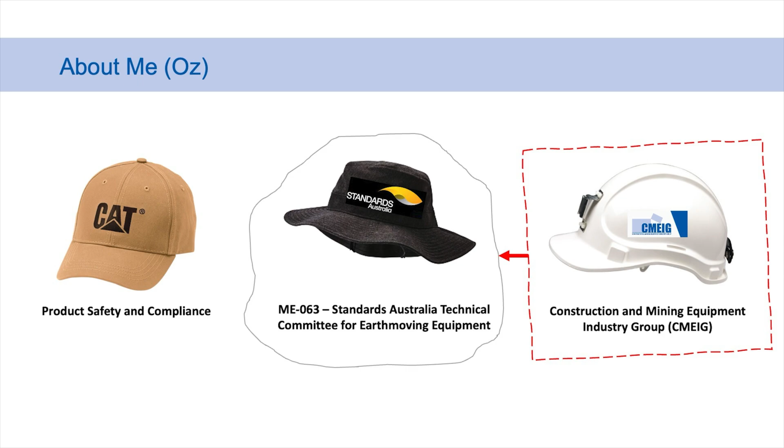So a little bit about myself. My name is Osama, please call me Oz. I have a day job at Caterpillar where I cover product safety and compliance for the Australasia region. But I'll point your attention to the two hats on the right, those are the ones I'm actually wearing today. I'm here representing an organization called CMEIG and another organization called Standards Australia.

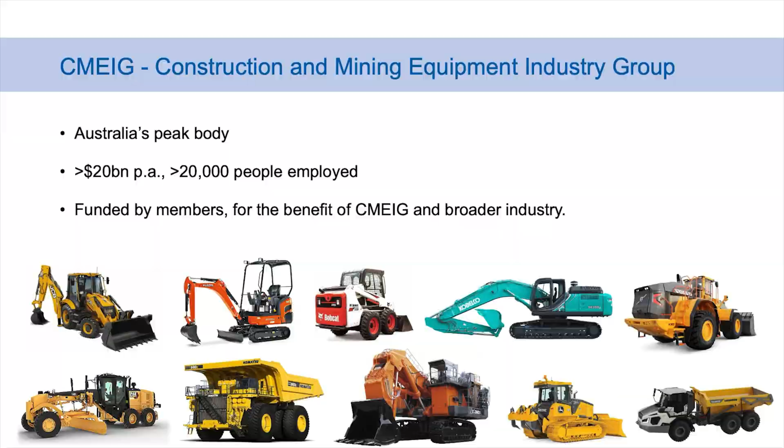CMEIG is the Australian Construction and Mining Equipment Industry Group. It's the peak body for the manufacturers of the types of equipment you see on screen. A pretty large organization, very active in standards development, and it's really funded by the OEMs to cover industry issues relevant to CMEIG.

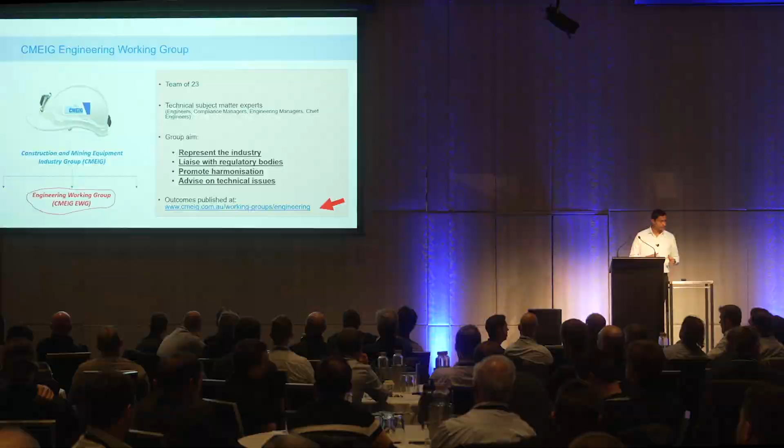Like the Mechanical Engineering Safety Seminar is a safe space for certain types of engineers, clearly not mining engineers or electrical engineers, in CMEIG there's a safe space for engineers too, called the Engineering Working Group. The intent of this group is really to offer up someone from each OEM as tribute, and we collectively discuss industry issues relevant to us, and then provide advice.

This is the point where I tell you the whole purpose of my presentation. If you have your phone in front of you, go to www.cmeig.com.au, click on Working Groups, Engineering. There's some great information there, written by people that couldn't sell ice to Eskimos. It's written by engineers for this community. Some of you might have already used it.

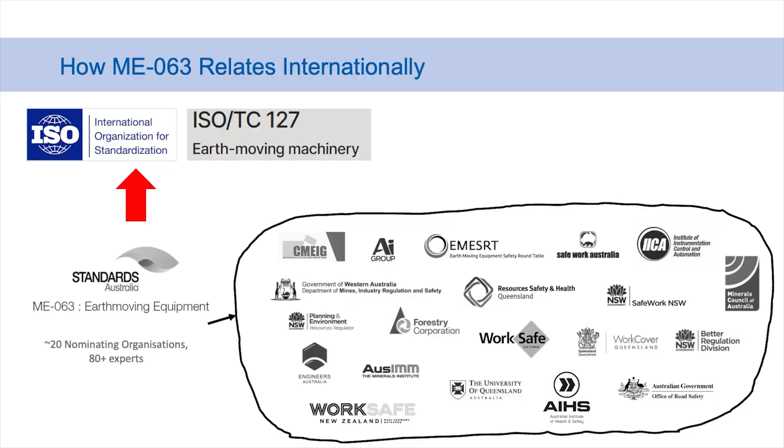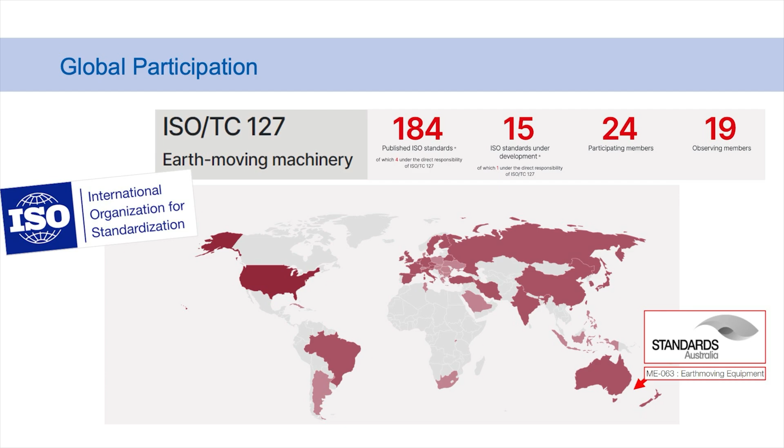That whole ME63 organization in Australia feeds up into an international committee called ISO TC 127, Technical Committee 127, that deals with the same topic. The only difference is Australia is one of 43 voices from around the world that feed into the writing of these international standards. There's 184 or 185 standards in that portfolio, and I think 15 that are currently actively being worked on. There's a lot of great work being done.

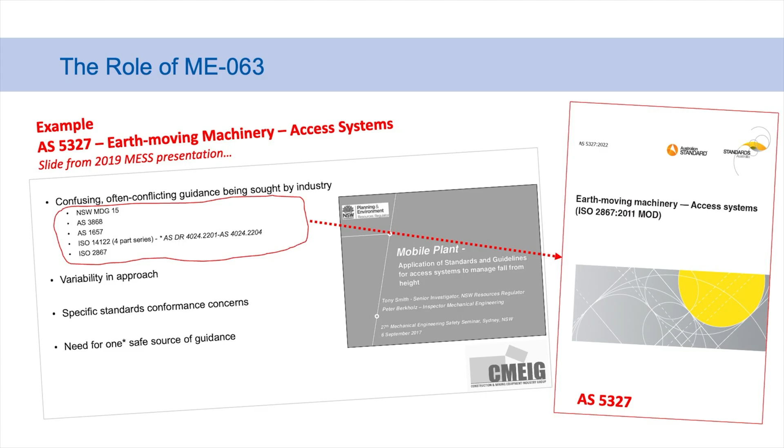But I'm gonna move us back to Australia for a sec. Hands up if you're familiar with AS 5327, Earth Moving Machinery Access Systems. Good, I'm seeing a few hands. So this is a standard that deals with steps, platforms, walkways, basically anything you would touch and feel and work your way through as you got from the operator cab or a maintenance area to off the machine.

I presented in 2019 on this topic, and I would characterize it as: before that time, we had 5 sources of guidance being used. There was a fixed plant standard, an old Australian standard, some guidance from EMESRT, and some international standards. The problem is if you have a lot of standards written by different groups of experts that came together, they're going to have technical differences. You're going to have a lot of trouble determining what is reasonably practicable, what is the benchmark, because they're just fundamentally different because of where they came from.

So the intent of AS 5327 was to take all that guidance and put it together in one document, so that you have one safe source you can go to and say, hey, this is the industry consensus position for what you need to do for access systems on machines.

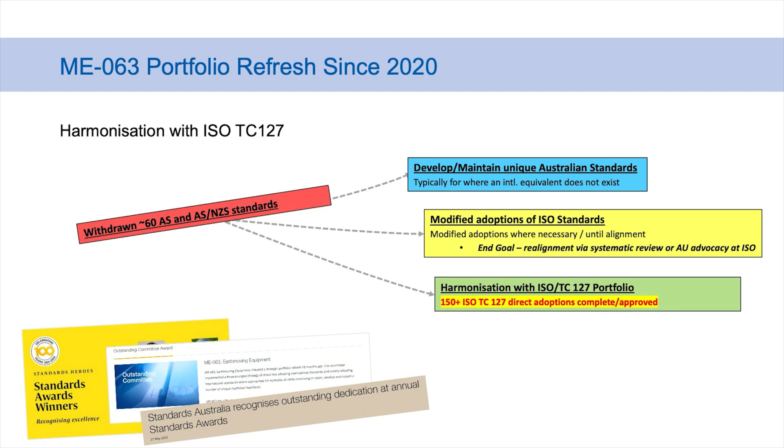So we took that approach from 2019 with AS 5327 and then leveraged it across the whole portfolio of standards we had. At the time, we had 60 standards. I think the oldest one was from 1982, and the newest one was from 2006. So quite a dated portfolio.

So what we did was we took that portfolio of standards and we put them into 3 baskets. One of them was, what is the international best practice standard? Do we have any objections to it? If not, let's adopt it as an Australian standard as is. And we've done that with 154 of them so far.

We had the second basket where, hey, we have genuine reasons for having perhaps a higher standard of bar, or a different standard of bar, because of the way we do things here. So they fell into this modified standard category. And then we have this final category where there really is no other international standard out there that we're aware of, and so we're going to maintain those as Australian standards.

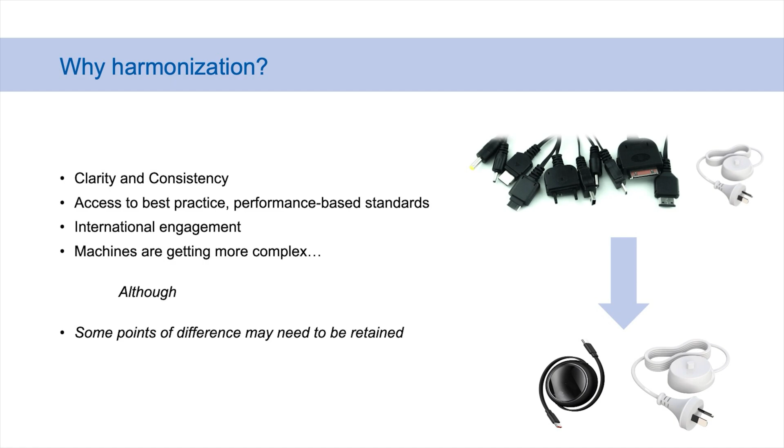So there's probably this question coming up now about why would you do this? What's the benefit of harmonization? It may be obvious to some, but I'll cover it anyway. Really, it's about clarity and consistency. You want to know what the benchmark is. Standards are your safe source, right?

There is also a benefit here to look at if there's an international community writing these standards. And the reality is, mining is big in Australia, but if you look at the broader earth-moving machinery sector, we're a very small piece of the international market, and we don't really have any manufacturers here. So there's an element of trying to not boil the ocean and focus on what are the things that we think are important, why are they important, let's make that clear.

But for everything else, let's make this as clear and concise as possible. Participating internationally, having the same portfolio of standards with modifications or without, also opens up this opportunity that, well, now we can take Australian experts and they can actually participate directly in the international standard that's being developed.

The final comment, and Cameron kind of touched on this in his intro, Robin touched on it, machines are getting a lot more complex. They really are. Machines, earth-moving machines are just like your cars. They are computers on wheels or tracks. They might have 20 computers on board. They might have a couple hundred sensors. There's a lot of software that is really driving that machine.

If you're going to take a machine and you're going to put, Robin, you mentioned e-stops, so I'll use that as an example, what do you want that e-stop to do? Australia is the only country that puts e-stops on machines. It's relatively easy to do when your answer is turn off the engine. When your answer is going to be, you have an engine, you have a battery pack, you have some other functions, you have telemetry, what do you want it to do? This is going to become very complex unless we have a standard format to use.

So where to next? Now, this is the next cab off the rank for ME63. It's been something we've been working on as a committee for probably the last couple of years, but it's getting to the pointy end.

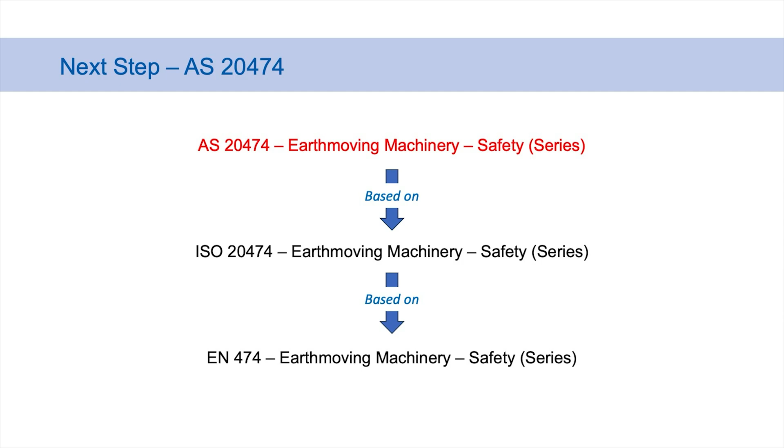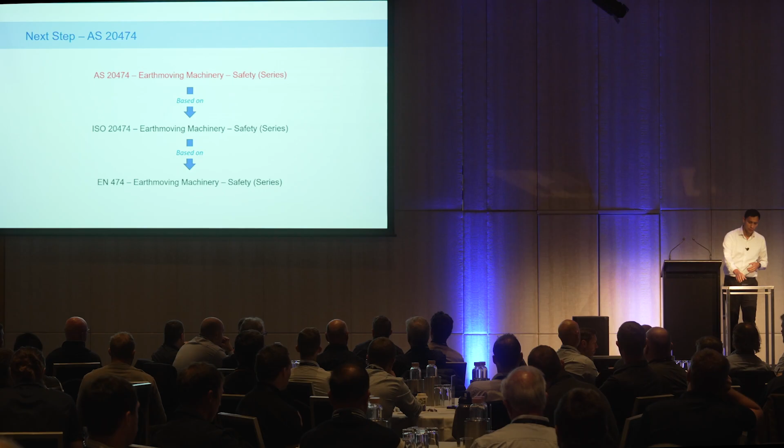AS20474, Earth-Moving Machinery Safety, is a series of standards. In Europe, there's a standard series called EN474. If you meet that standard, that's a regulatory requirement, and you put a CE mark on your machine indicating you meet the legislative obligations in Europe. That standard was converted into an ISO standard, ISO 20474, around 2016 for the last revision. We've started working on our own version of that, which is AS 20474.

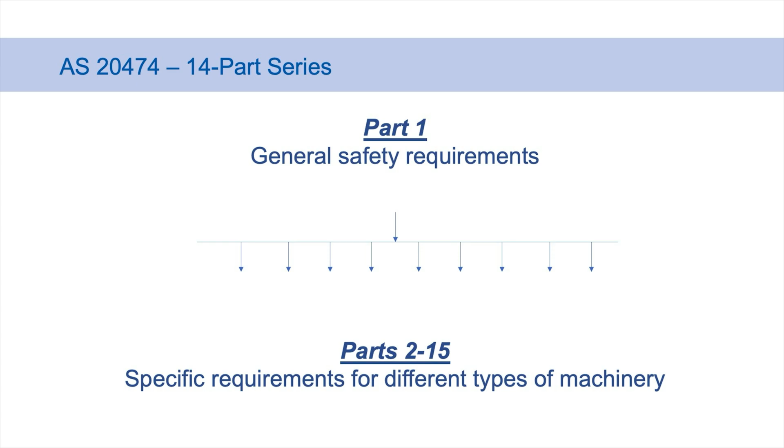There's a part 1, general safety requirements, and then 13 other parts. If anybody wants to ask why the numbers go to 15 but there's only 14 parts, I'll look forward to that question.

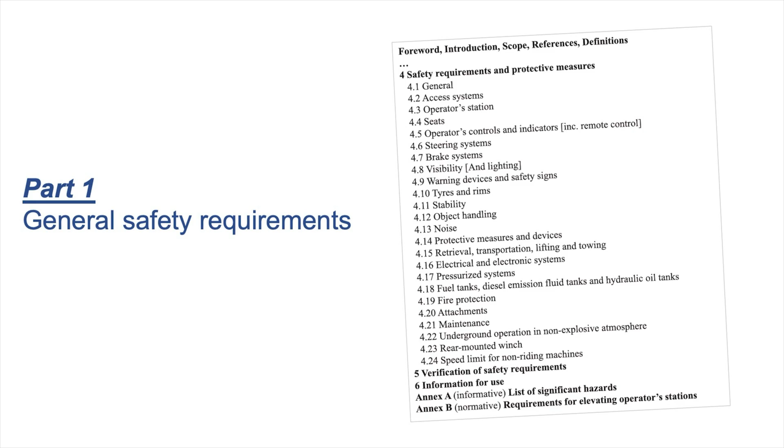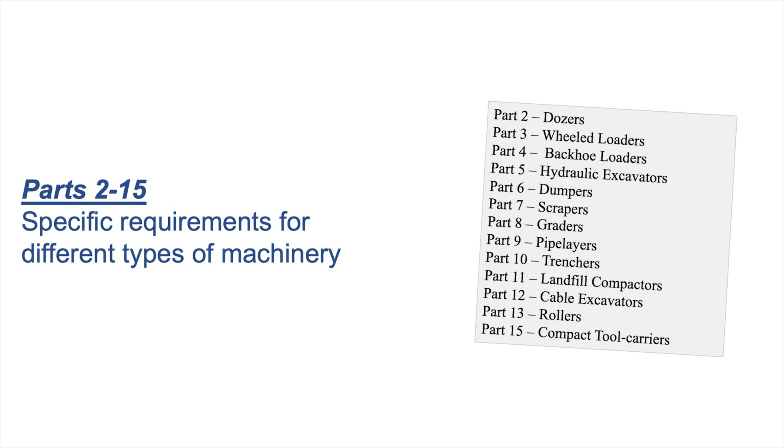Think of part 1 like the overarching requirements every earth-moving machine needs to have. It'll have a section on seats, vibration, noise, ROPS, brakes, steering, and in a lot of cases it'll say these are some requirements, then say go read AS 3450 for brakes, or 5010 for steering, et cetera. Then you have parts 2 to 15, which are specific requirements for specific types of machines. So 2 is dozers, 3 is loaders, 6 is trucks, et cetera.

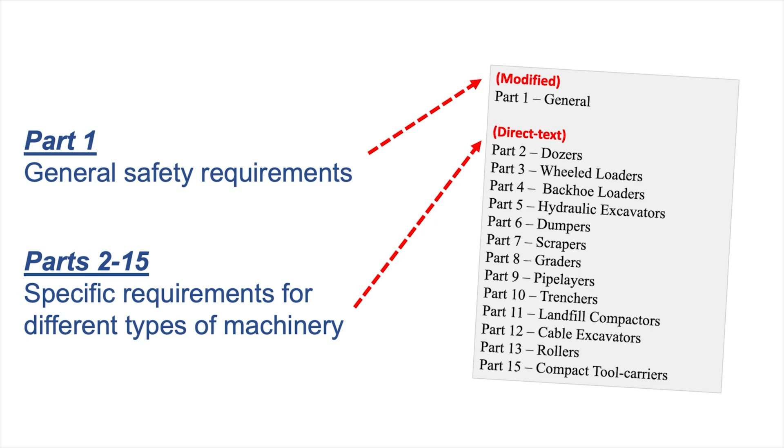The direction we've gone in ME63 is that part 1 is going to have some modifications. There are some things where Australia is different and not covered in the ISO standard, so we're going to address those in that Australian modification. For the other 13 parts, they are going to be direct text adoptions.

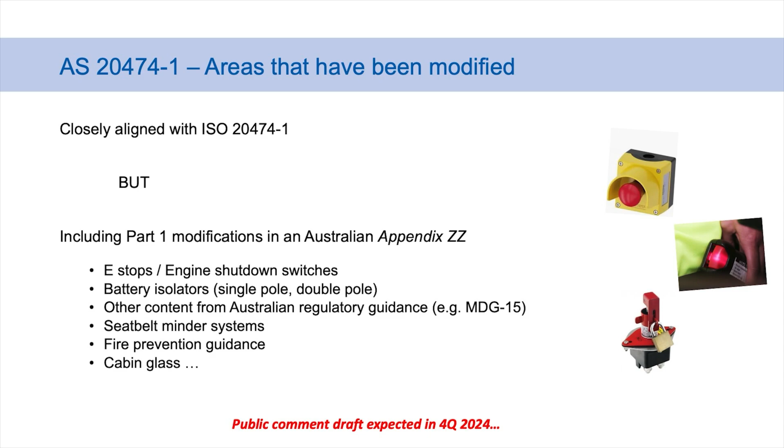Here are some of the key modifications you'll see shortly when this comes out for public comment. There's some guidance around e-stops and shutdown switches. It might not be true for New South Wales mines, but certainly the rest of Australia and non-mining - if you have an e-stop on your machine and press a button, it may well do nothing, because it may not have any monitoring. There's a whole argument around whether that's acceptable, whether it's intended to replicate existing machine control, or just another tool you can check manually over time and accept a certain level of it not working every time. The standard does have some language around that.

It has some language around double pole and single pole isolators and when each is appropriate. It has some guidance related to the leading cause of injury and fatality on earth-moving machines globally, which is still people not wearing a seatbelt - things to encourage wearing seatbelts, and things to monitor when somebody leaves a seat and the machine hasn't been put into a park position or an interlock applied. It'll have some guidance on that.

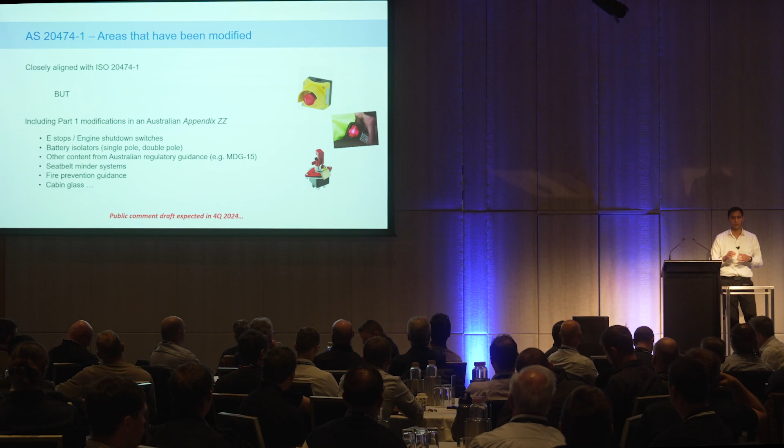It's going to come out for public comment probably a couple of months from now, so look out for it. If you don't have a notification, go to Standards Australia's website and subscribe to notifications, and you will see when standards come out for public comment.

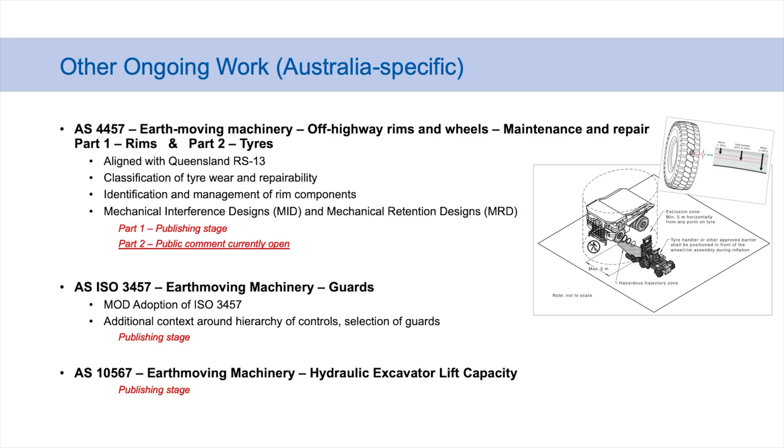There's some other work ongoing. There's a 2-part project related to tires and rims in development. Part 1 deals with rims and is at the final publishing stage, should come out in the next month. Part 2 deals with tires and is currently at public comment for another week and a bit. Feel free to log on, have a look at it, and make comments - we'd very much welcome those.

If I summarize the big changes in these standards, part 1 is focusing more on making sure you don't mix and match components on split rims, so you don't put the wrong lock ring on a machine. It's also got guidance around the fitment of devices like, I'll use the trade name SureLock, and other such devices that either retain the lock ring or prevent inflation if it's not correctly seated.

There's a couple other projects - one related to guarding that should publish in the next month. And there's another one for lifting with excavators and how you determine the change in stability limits depending on if you're across the tracks or over the tracks, if your boom and stick are all the way out, et cetera.

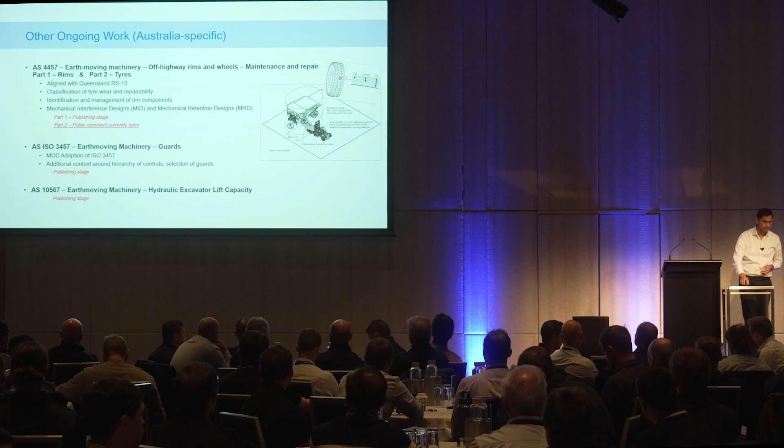There are also a large number of international standards that are in development at the moment. There's 15. I've covered the ones that I think this group is going to be most interested in.

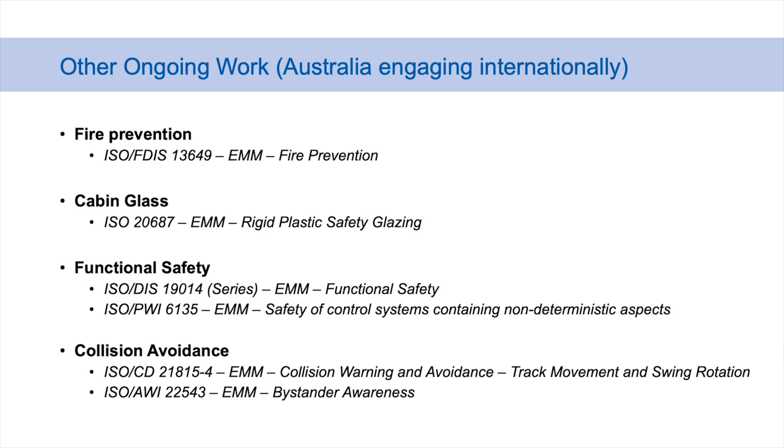The first one is ISO 13649, which deals with fire prevention. This should publish by the end of this year. It'll look very familiar to you because it has a lot of the language that's in AS 5062 around design, which has been captured into this international standard.

Think of it as complementary. The intent is that this is going to help the designer of your machine with, hey, here's the 20 things you need to think about that are seen at the end point of a machine catching on fire. There's not going to be surprises.

A lot of it is hose maintenance, but it's also how do you design to make it easier to do that? How do you make it easier to design so that it's easier to reroute hoses the same way that it was done at the factory after its first big change-up?

There's a standard going on about cabin glass, and I'll cover this in a little bit more detail later on. There's some work being done around functional safety standards to make them aligned for use in Europe. There's also a new standard underway to deal with how do you do functional safety for non-deterministic control systems.

So this is when you are essentially using AI or some sort of probabilistic algorithm. Think of autonomy programs. You can't really use traditional functional safety standards as they stand, so there's a project to try and work on that.

There's also some work being done around collision avoidance. There's basic collision avoidance—think of it like put it in reverse, doesn't move if it detects an object. This part 4 that's in development is around swing frames, so think excavators mainly. How do you deal with rotational collision avoidance zones, and how do you deal with track machines?

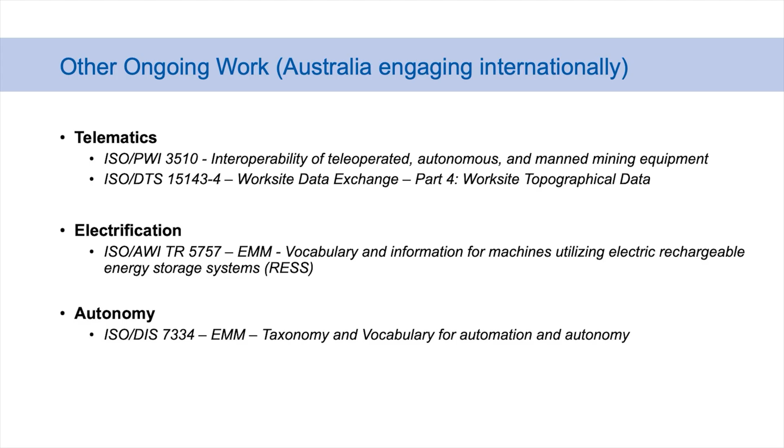There's work around electrification, and most of that at the moment has been exploratory. You have this large portfolio of standards. How do you apply those standards to an electrified powertrain?

And it's uncovering some interesting things, like there's an hour meter standard, and it's completely redundant for a battery electric machine, because hour meters are used for service, for warranty, for used machines. So how do you determine hours of usage when you have a battery electric platform or a hybrid platform versus what we're used to seeing?

And there's also some work being done around autonomy where there's a bit more maturity in the sector, and we're at the point where it's time to start defining different levels of autonomy. Like you have in cars, you have level 0 to level 5, similar kind of taxonomy for earth-moving machines.

So this is the point where you go, tell me more about standards—it's so exciting. In your commercial statements, you always have these forward-looking statements. It kind of says, treat this as just an opinion about how things are going to be in the future. I've got just a few slides to do that for you here. These are things that are being discussed in the standards world, either in Australia or internationally. They're not ready for prime time.

They're not at a position that you're going to see a published standard this year or next year, but I wanted to give you some insights.

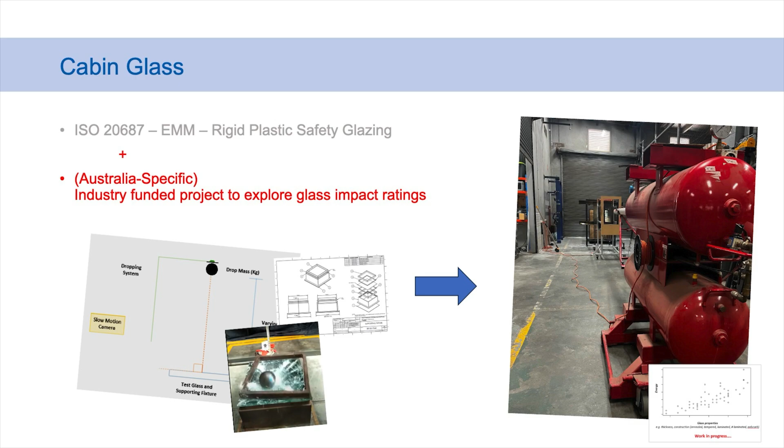The first is around glass, and some of you might have done glass testing to AS2080. It's like a 300 mil by 300 mil box. You drop a 2.2 kilo ball from 4 meters. Some people have changed that to 9 meters. So you end up with about 200 joules of impact energy.

There's some work being done internationally to look at plastics, so polycarbonate windows rather than your conventional laminate or tempered glass. And we're talking about 2,000 joules instead of 200 joules. You get to this point where you'd have to drop it from quite a big height and change the mass and shape of the ball.

Instead, you could go down the Mythbusters route and get an air cannon and shoot a projectile horizontally. There's been some industry-funded research to do that in Australia, but looking more at the laminated glass rather than the polycarbonates. If you want a pecking order, tempered glass capability is about down here, laminated's probably somewhere here, and then polycarbonates are beyond that.

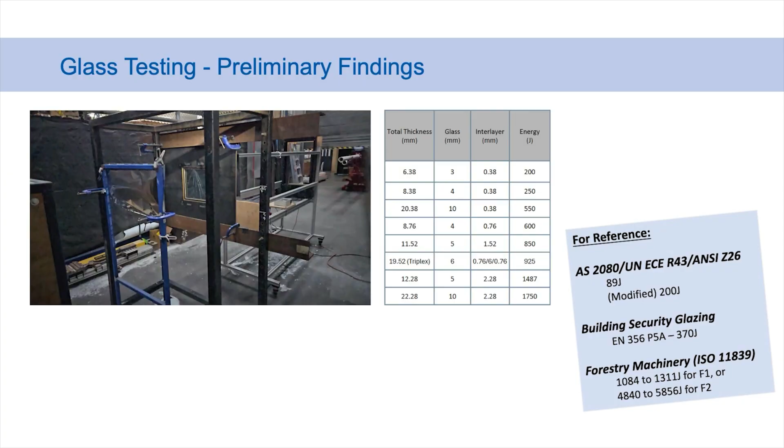So I hope this video plays. See that? That's about 2,000 joules going through a chronograph into a vertical assembly with a 300 mil by 300 mil glass sample. The blue frame you see moving away from you at slow-mo speeds has a witness card that's meant to reflect the human body a certain distance behind the glass on the inside of the cab.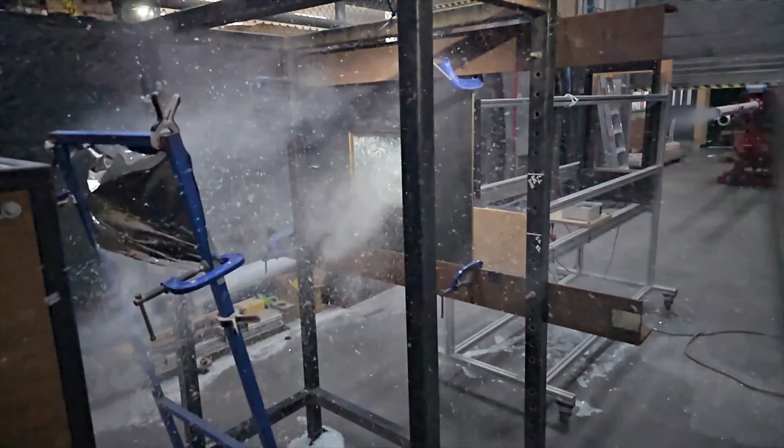The issue that we're seeing, and spoiler alert for a report that'll come out in the next few months, it's not so much the thickness of the glass that matters. It's actually more the thickness of the laminate layer, because that's what holds it together. The issue you have is if you have glass sandwiched with laminate and glass, you'll stop the projectile, but the spalling out the back end will do some serious damage still.

So short term, what's the answer? More work required, but the answer may be something like you need a tint film on the inside of your cab. There's some practical issues with how easy is it to apply those, how robust are they, do they haze? But that's the direction it's going. Basically, the thicker the laminate, the better the performance.

I've been working around standards for about 15 years, and it's quite an interesting time to be in this space. I was going to say dynamic, but saying it's a dynamic time and standards in the same sentence just doesn't work. But there's a lot of existing standards work.

Like Robin pointed out, there's a lot of things like visibility standards, braking standards that are being looked at. But then there's all these emerging topics that are your step change items. They're fundamental differences to how you operate machines, and so the standards that are written around that. Starting to see some of those step change topics come up.

There's also, because we're entering a new era, you have safety standards which come more from a maturity, and then now you have performance standards because it's such a new area and you actually have to write those again. The old version of performance standards would be things like, how do you measure volume in a bucket? We're kind of getting to, how do you measure fuel efficiency or energy efficiency for a machine. Those kinds of standards are coming back into the forefront.

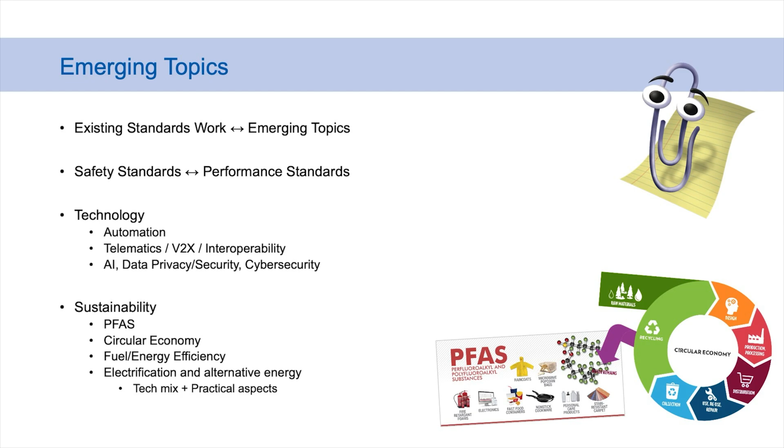There's a lot of talk about how do you manage that interoperability. And there's a lot of talk about AI. Some of it is flavor of the month, just giving you my opinion. You remember Clippy back with Word and Excel back in the 90s? Yeah, Clippy was AI basically.

The talk now is about large language models and generative AI. That's really what's different, and that's really a data conversation. So what you're going to see, I think, is a lot of interest in who owns the data, how do you use the data, how can you use the data, and you'll see standards work around that.

There's also a lot of talk about sustainability, and emerging technologies for energy transfer is one of those areas, but there's also things like chemical management. There's a big desire to track and trace to a component and subcomponent level, down to what mine you sourced this material from that you put into your solder, that was on your circuit board, that went into another supplier, to another supplier, onto a machine. That is a lot of work, but it is something that's being worked on as well.

Does anybody know what comes after Gen Z? This will make you feel old, but it's one of those cases of when you run out of an alphabet and you have to start again - Gen Alpha. I've got a couple of Gen Alphas at home, an 8-year-old and a 6-year-old. Gen Alphas will be on your mine sites in 3 years.